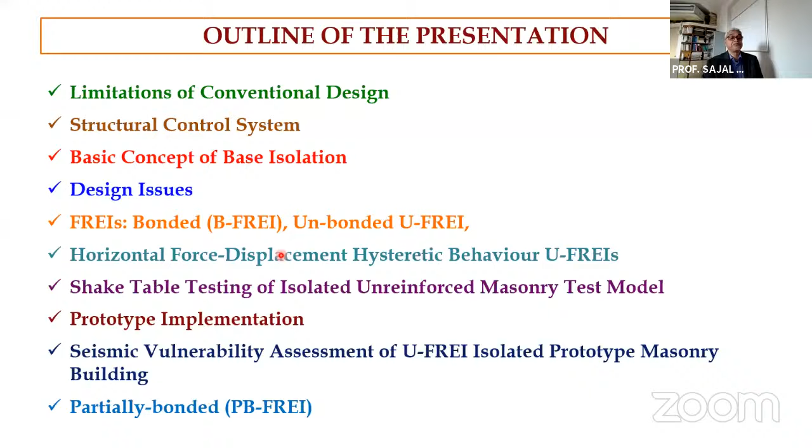Now, all of us know what is the problem with conventional earthquake resistant design philosophy. We rely on damage in the structure in certain specified locations for enhancing ductility in the overall system. So that means we are ensuring safety by deliberately allowing damage in certain pre-decided locations in the structure. So a structure cannot be realistically designed in an elastic manner, particularly in regions of high seismicity.

Now, common practice is to design them so that they experience damage in a controlled manner. They undergo large inelastic excursions, and thereby we get earthquake resistance because of ductility, which allows redistribution of stress resultants. So this is what we want to avoid. We want to avoid or minimize to a large extent the damage in the structure.

So what are the options? Conventional structures cannot avoid that. Even if you follow the codal provisions, there will be damage, maybe in a controlled manner. And another thing, conventional structures actually ensure life safety performance level. So if you want to design a structure for a higher performance level, then you'll have to go for structural control techniques. So there are three types of structural control techniques.

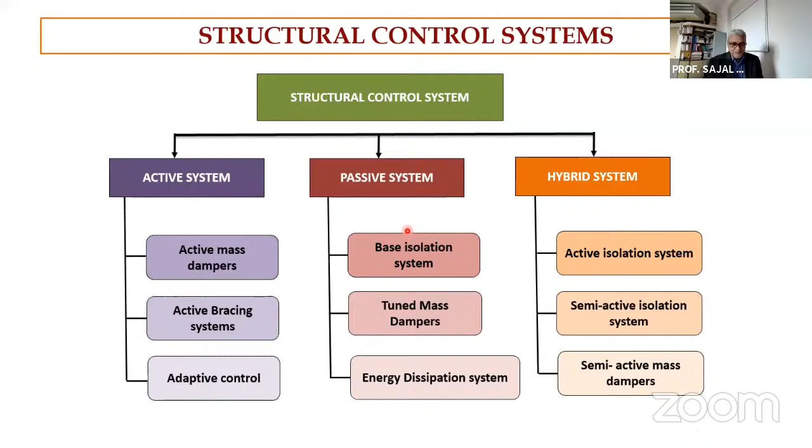Now, once you mount your building on isolators, basically it decouples the building from the damaging component of your earthquake input motion, and thus prevents the superstructure of the building from absorbing earthquake energy. The entire superstructure must be supported on discrete isolators whose dynamic characteristics are chosen to uncouple the ground motion. So here comes the role of design of this isolator: how to fix the dynamic characteristics of these isolators so that we can decouple, and transmissibility of ground motion to the superstructure will be minimized. So that is what we are going to discuss today.

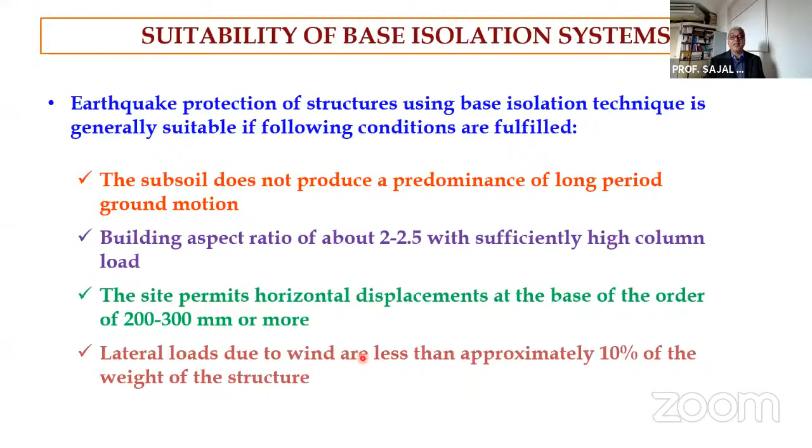At the same time, we can reduce the stiffness for achieving this frequency of 0.5 hertz in the isolated structure, or 2 seconds of time period. Okay, so this is the objective. Now, how do we achieve this low stiffness in the horizontal direction, while the same unit has to transfer the column load, so they should have sufficient vertical stiffness, and in turn provide vertical stability? So how do we achieve that?

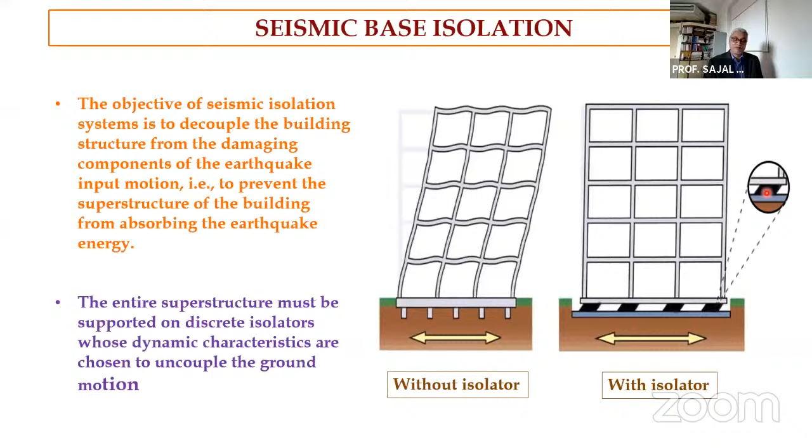Now, as I already told you and showed in this slide, these elements will be subjected to large deformation, while the superstructure will experience very low interstory drift. So this element should be able to carry both the high vertical load transferred from the column, as well as the large horizontal deformation it will experience. Both actions have to be taken into account, so estimation of the maximum displacement is very important.

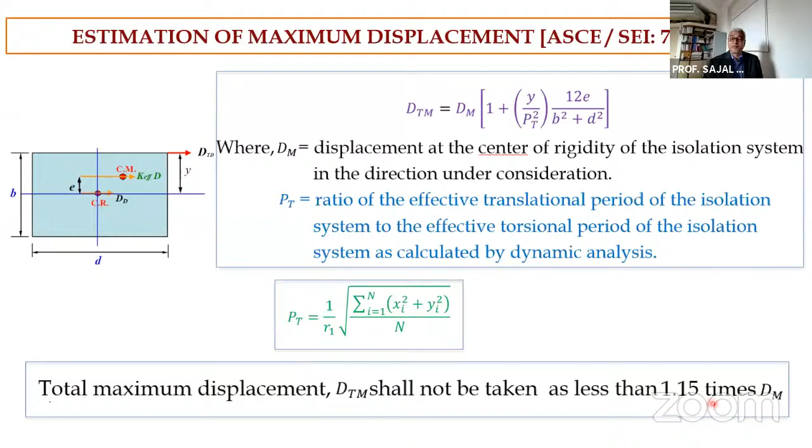If it is less than 1.15 times DM, then you will have to consider at least 1.15 times DM, that is 15% more corresponding to this DM. So these are the two things you will have to consider in isolated design. These are very important things.

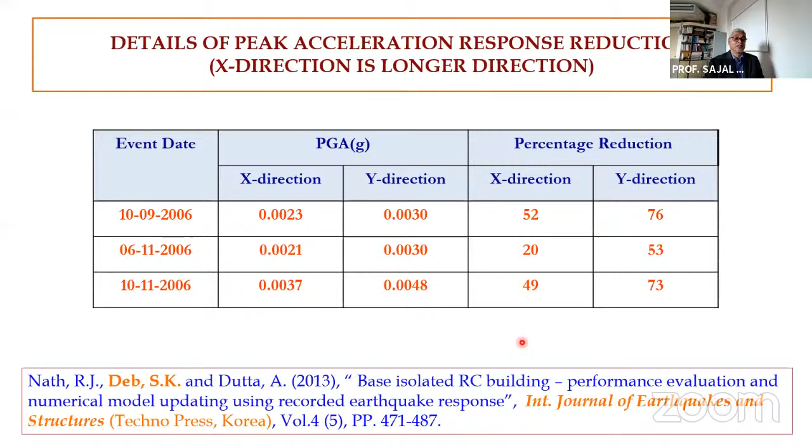Because of those limitations - high weight and complexity - we started thinking differently. At that point we came across a publication from Professor Kelly around 1999. As I told you, this was the first published work in FREI, that is fiber reinforced elastomeric isolator. We also started around 2009, 2010, and have already published around seven papers in top international journals.

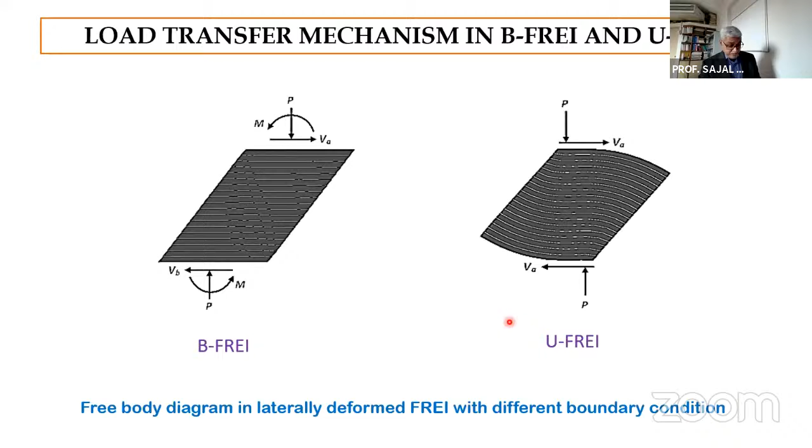So this is the basic difference between the load transfer mechanics of the unbonded isolator, whether it is steel reinforced or FREI, bonded FREI - here it is totally different. The mechanics is totally different for the unbonded fiber reinforced elastomeric isolator. This is the point you need to understand at the beginning.

Now this is about how to model your FREIs, and what are the advantages. Use of fiber reduces the weight, as I told you. Some modification will be needed in manufacturing technologies - sandblasting, acid cleaning, etc. is not required. You can go for long strips and then cut to smaller sizes, but this is a very difficult exercise, as we have seen. We have designed FREI, model FREI, to start with.

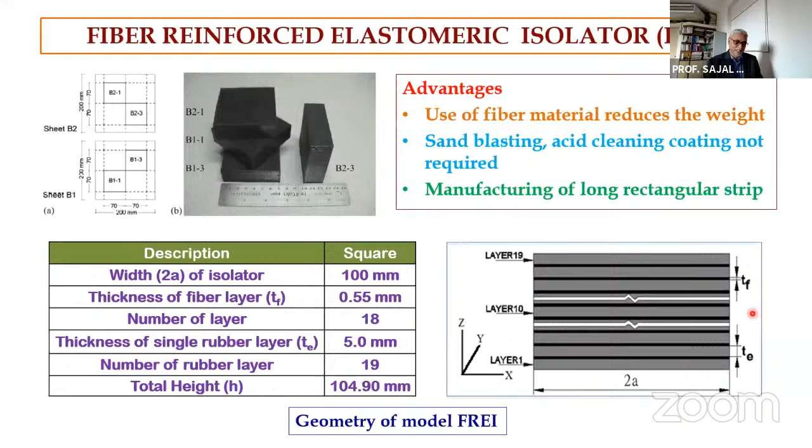This is the geometry, this is the elastomer layer. The black line is your fabric, carbon fiber fabric to be more precise. We have designed this and calculated the critical load also, and that critical load should be much higher compared to the vertical load - maybe around 100 or 200 times the vertical load - so that you can avoid unwanted modes of vibration like rocking. But it allows horizontal flexibility to reduce the transmissibility of excitations in the horizontal direction.

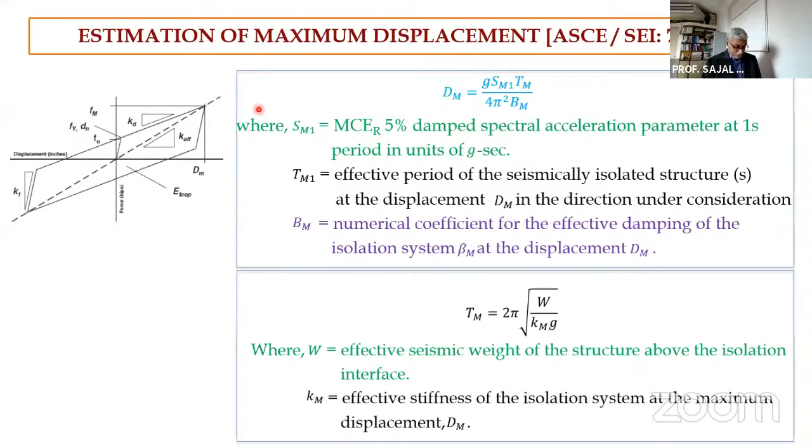Now you may wonder how our work is different from what has been reported in literature, whether from work by Tait and others, work carried out at McMaster University, or Professor Kelly's work - if you see their damping, they didn't get an increase in damping. The damping reduced with displacement. In our case, damping is increasing with displacement, so that is one fine attribute of our approach.

Our manufacturing technology is also different from theirs - they used cold vulcanization, we used hot vulcanization technique. This is a very challenging task, to vulcanize fiber and elastomer, but with the help of our industry partner, we developed the technology for hot vulcanization of elastomer and fiber fabric. This is what our innovation is all about - higher damping with higher displacement level, that is one addition, and the vulcanization process. This is the main outcome of our innovation.

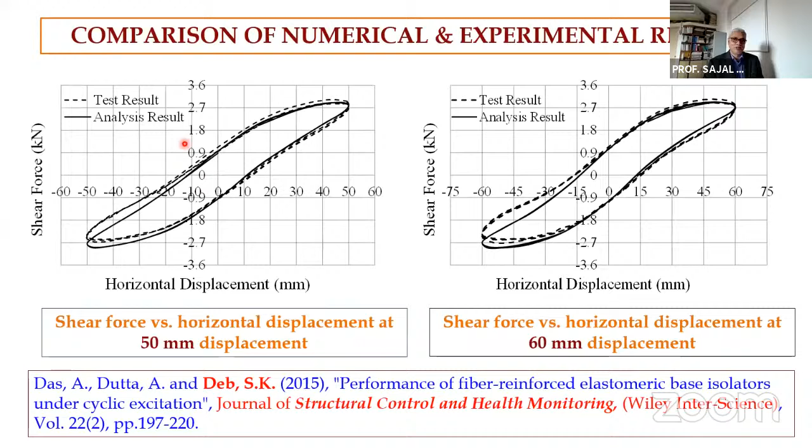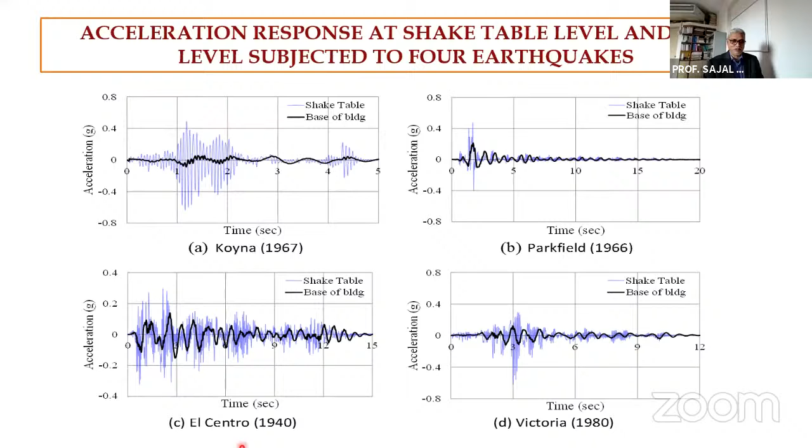Now here you see, the light response history shows the table motion, and the deep one shows that at the base level here. Base level for Koyna, and you see a lot of reduction in transmissibility of ground motion. In fixed base, as you move towards the top, it will increase, it will amplify. Here it is getting reduced. So the isolator we have designed is effective irrespective of characteristics of the ground motion. It is a reduction anyway. And here at the base level, first floor level and roof level, we have plotted the accelerations, and you see more or less they are overlapping one another.

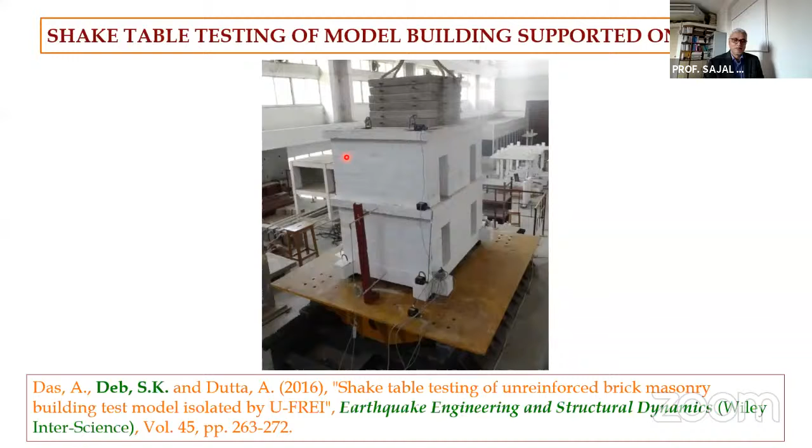That means what? There is no amplification of acceleration as we move from the bottom accelerometer to the top accelerometer. There is not much amplification. So basically, this test model of unreinforced masonry is acting as a rigid body. And there is very low interstory drift, and that is evident from this figure. Here we have shown displacement time history; displacement at the base level and first floor level are both overlapping one another, isn't it? So there is negligibly small interstory drift. So this shows that our isolation design is okay, and it is very effective.

All right, now here you can see the peak table acceleration is 0.63 g, and at the base what we experienced is roughly 1/8 of that, or 1/7 of that. Okay, so large reduction in Koyna.

In the Parkfield earthquake, around 60% reduction at the base level. In El Centro, around 50% reduction. So this reduction is a function of the characteristics of the ground motion. So this is what we see in passive control.

In active control devices, their effectiveness will be more or less the same, because we shall be tuning their properties in real time, but in a passive system we cannot do that. So their effectiveness will vary with the ground motion characteristics, and that is what is reflected over here. But nevertheless, in all cases, we got a reduction of more than 50%. So our base isolation system is very effective.

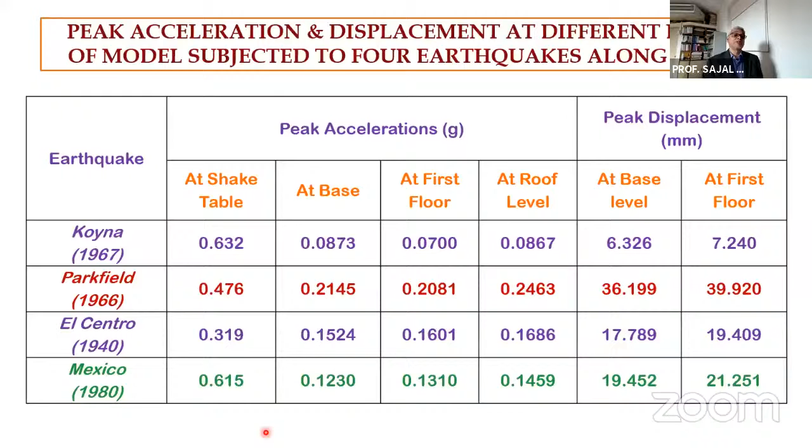So this is based on this model study. After that, we thought of implementing this in one prototype building. So this is a prototype bearing we have designed for one building, which I shall show you in a subsequent slide. So there are two sets of bearings we have designed. One is about 35 ton capacity.

Pardon? Yeah, so you can expedite. Okay, thank you. Around how much time do I have? Actually, we started a little late, so still another 10-15 minutes. Okay, I shall try to conclude.

Okay, so this is a prototype bearing, FREI, unbonded FREI to be more precise. The highest capacity was 50 ton, and the second category had 35 ton capacity. And earlier, as I told you, the steel reinforced elastomeric isolators we used in our base isolated building also have 50 ton capacity, weighing around 400 kg. This is weighing around 15 kg or so. You can lift it with your hand. And here there is no end plate at the top and bottom.

And this also we have tested. This was a makeshift arrangement we made because we didn't have an ideal bearing testing facility at that point of time. Now we are procuring one. Probably this month we shall be installing a hydraulic press specifically for testing seismic isolators, up to 300 ton capacity. That is also not big, but that is what we can afford.

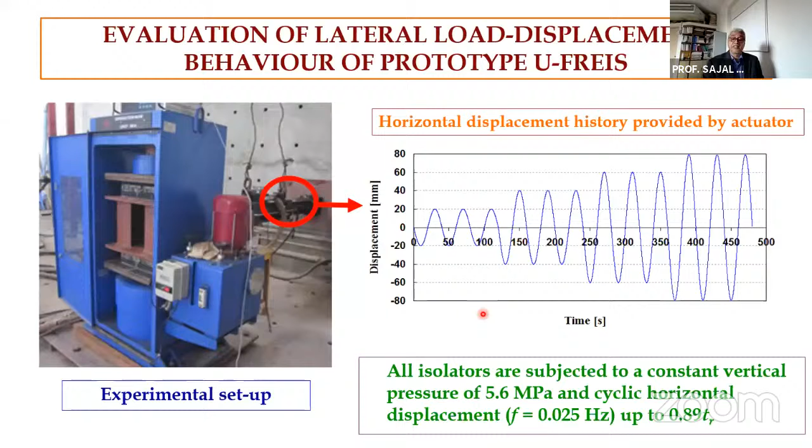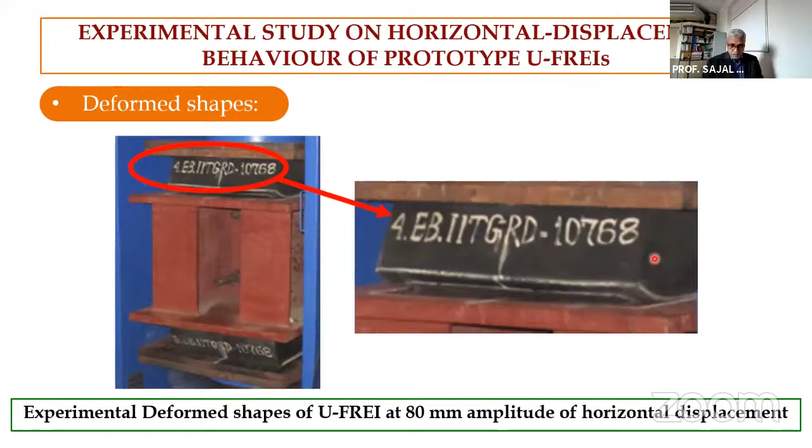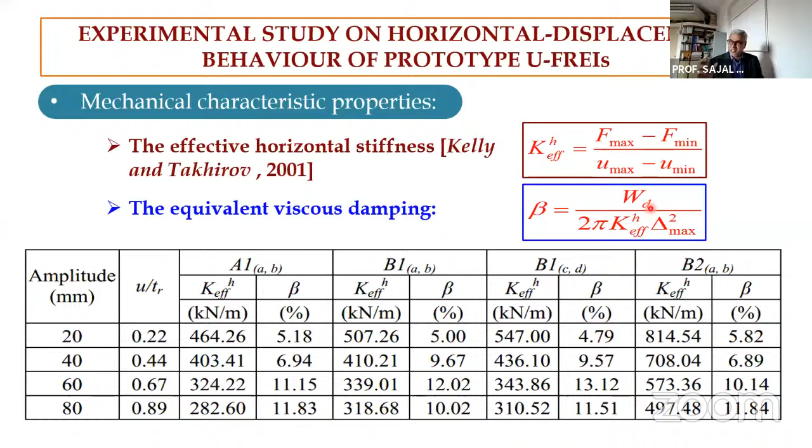This is how we have found out the effective stiffness and damping. And based on this damping, you can find the beta B factor we considered while estimating the maximum displacement. So this I shall skip. Professor Datta will talk about it.

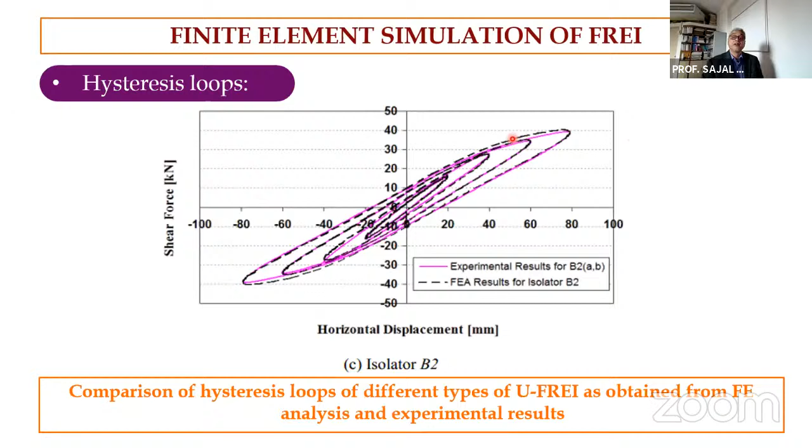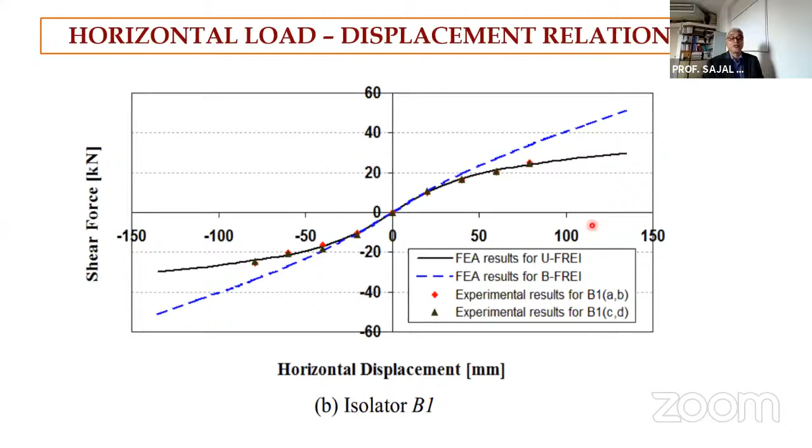Now, this is our contribution. As I told you, initially we found the stiffness of the isolator from G into A divided by tr. Now, for the unbonded one, this is what we have proposed: G we are replacing by G effective.

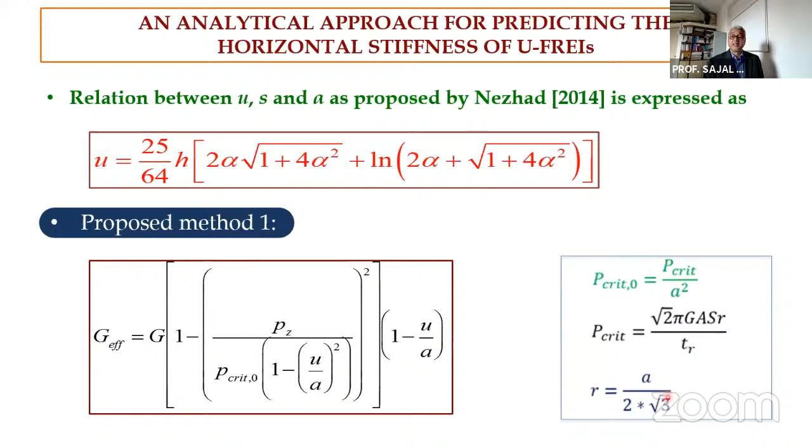Okay. How to find out G effective? What is the basis? As I told you, this will be explained by Professor Datta. And this is the equation we have proposed. One equation we have proposed. And in this, what is the definition of critical load? It is defined here. How we can find critical load? G, that is the shear modulus. This is area, then shape factor. These are all geometric properties, S and A. This R is the radius of gyration, and G is the material property.

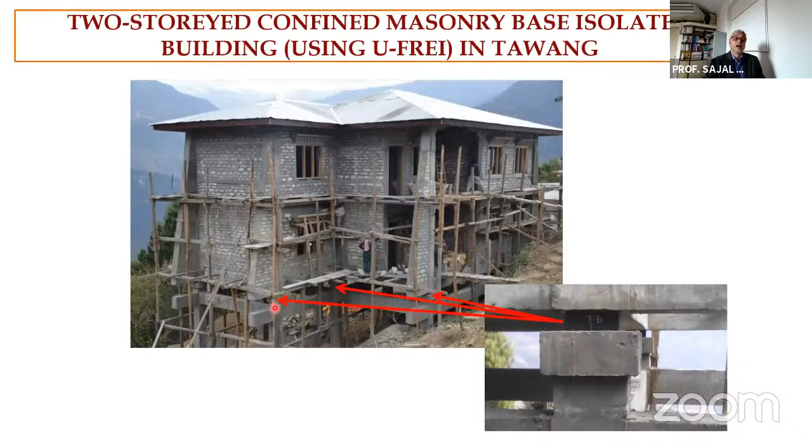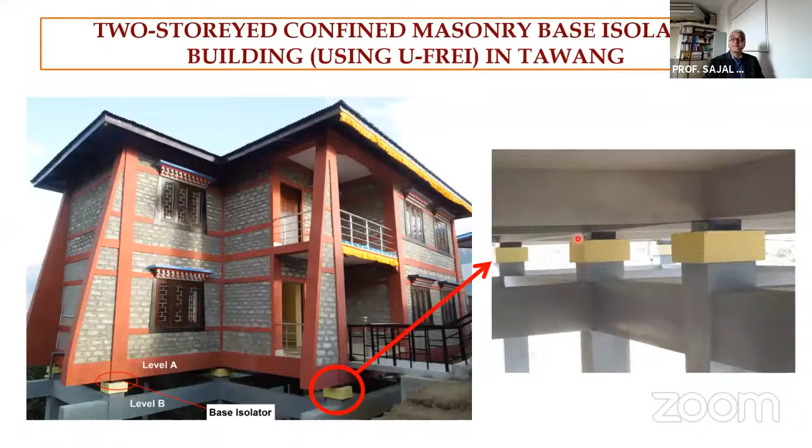So that is how we have done it, simple, and this we can do in a far-flung area like Tawang in Arunachal Pradesh. Okay, so that can be implemented anywhere. So our aim is not to develop a system only for so-called engineered and highly sophisticated buildings, but this can also be used for simple masonry buildings. Okay, so after construction, it looked like this. This is the building, a simple guest house, two-story building. These are the discrete isolation system, UFREI.

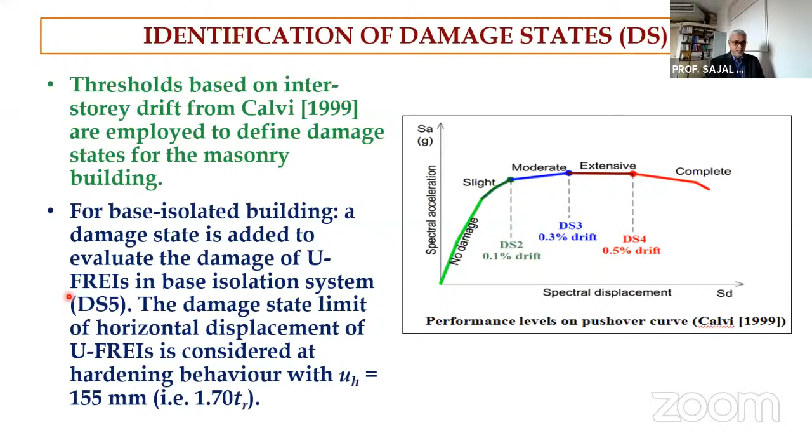Okay, then we have carried out vulnerability assessment. I'm not going into detail. For pushover analysis, we have modeled the superstructure. Then this is how we have defined the damage states, as per this particular paper of Calvi, published in 1999, and this is the additional damage state we have defined for the isolator. The first 4 damage states are for the fixed base one, and the last damage state, in addition, is for the base isolated one. We carried out the vulnerability assessment numerically for both, and considered the additional damage state in the base isolated building.

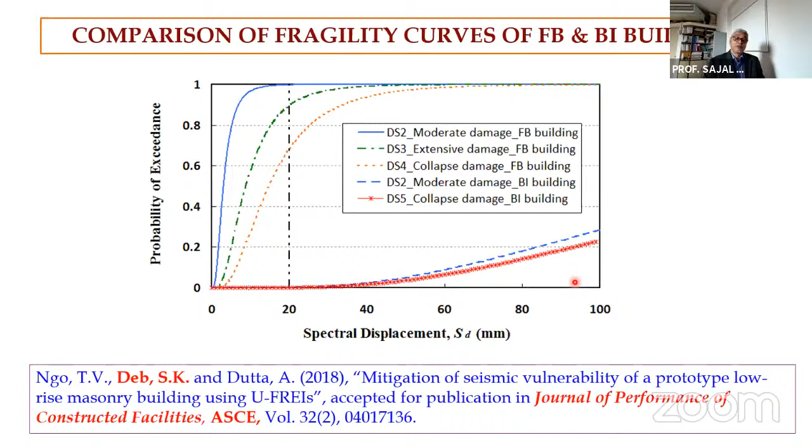Okay, now next, we have started this work on the partially bonded fiber reinforced elastomeric isolator. There was a lot of apprehension actually. What will happen?

During an earthquake, because in the unbonded case the load transfer is basically taken by friction between the rubber layer at the top and the concrete, if the normal reaction changes, what will this frictional force be? Some apprehension is there. So there is some work done by Toopchi-Nezhad and others, and they have developed this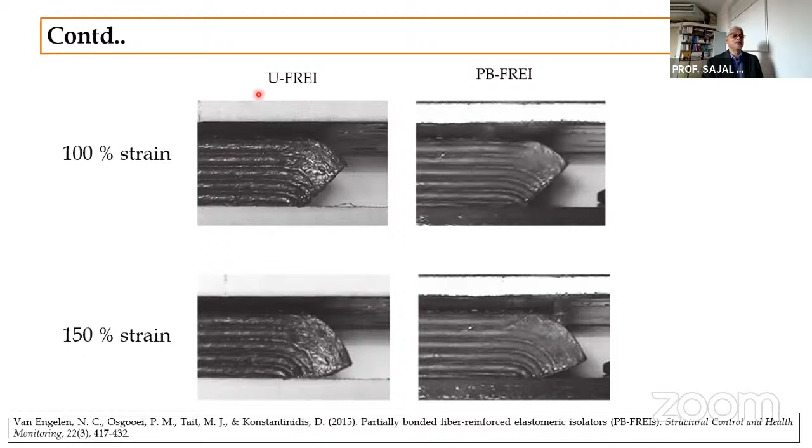They have carried out tests for both UFREI and PB-FREI, and the deformed shape in both is more or less the same. But we'll have additional safety because some amount of bonding is there. So that is what we are going to develop in our next step. And this is what we shall employ in an upcoming G+4 building in Itanagar. Here we are proposing to use partially bonded elastomeric isolators under all the peripheral columns.

There the variation in the normal direction will be higher, and here the column load is also high, and that variation will be low because these are close to the CG of the building. So these blue dots will be unbonded FREIs, or unbonded fiber reinforced elastomeric isolators. So we will be using both types of isolator as a combined system in this building for seismic isolation.

Because in unbonded and partially bonded isolators there will be a difference in height for the same properties, there will be a level difference between the two. This is the unbonded one on the inside. This is the outside one, the red dots. If you consider a section here, the bearing height will be a little more because of those end plates. If you consider, say, a 15 or 16 thick plate, 4 times that additional length will be coming.

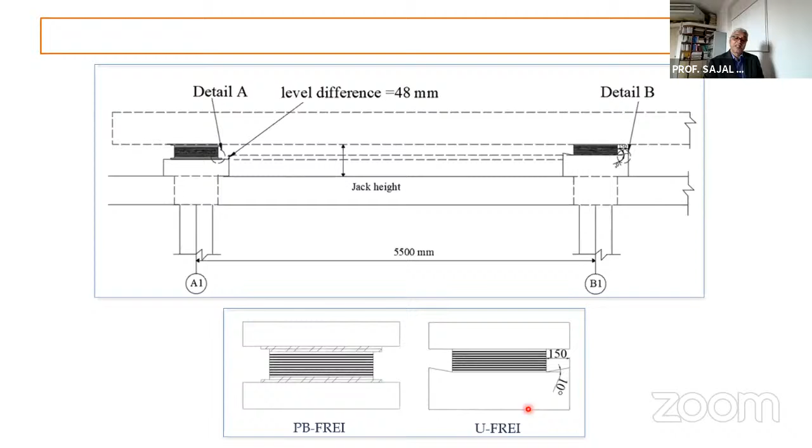So that can be adjusted. And for additional safety, we provided a profile at the bottom, something like this, so that, although we have not seen any slip, if at all that apprehension is there, we want to remove that apprehension also. So this is the last slide.

So far in India, as discussed earlier, there have been no base isolated bridges. Possibly this is going to be the first base isolated bridge in India. Originally this was planned as an integral bridge, but because of the high hazard level, the designer found it very difficult to design the piers and foundation. So now they are changing to a base isolated bridge. For these 6 pylons, there will be 4 bearings in each.

So a total of 24 bearings will be used in this bridge, which is coming in Guwahati city, the third bridge in Guwahati over the river Brahmaputra, and they will be using friction pendulum bearings. I'm not going to discuss this because Professor Matsagar and Professor Jangid will be talking about friction isolation systems. This is just a piece of information. Possibly this will be the first base isolated bridge in India, and that too over a major river like the mighty Brahmaputra.

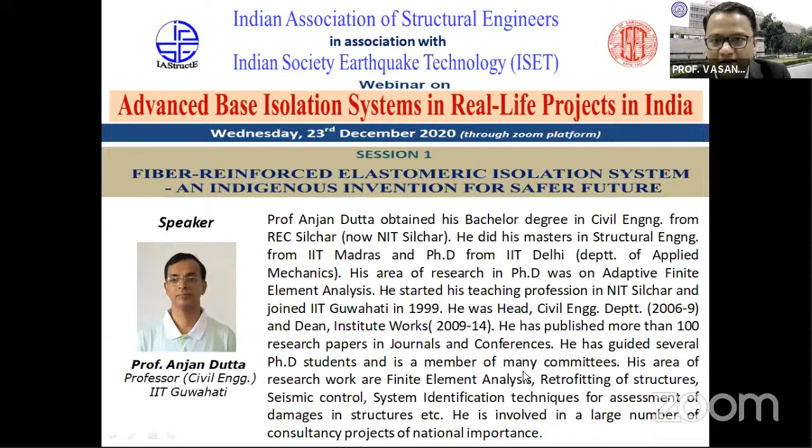His areas of research work are finite element analysis, retrofitting of structures, seismic control, system identification techniques for assessment of damages in structures and others. He is involved in a large number of consultancy projects of national importance. So today he will be talking in the forenoon session on fiber reinforced elastomeric isolation systems, particularly with focus on the finite element analysis. So Professor Anjan Dutta, kindly take over.

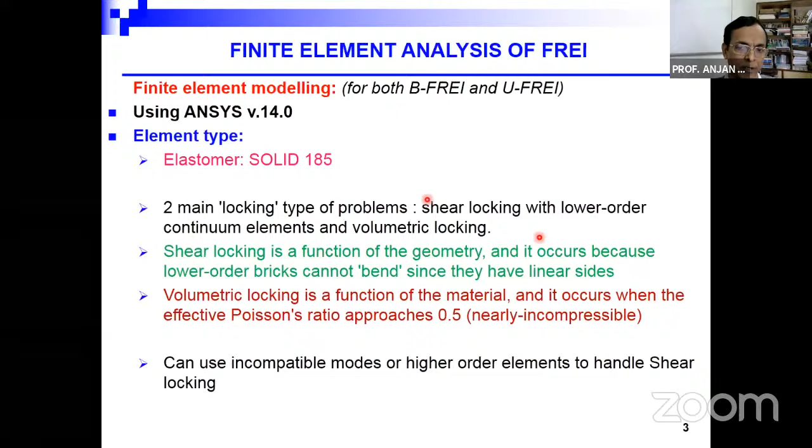You can also use uniform reduced integration. For example, if I use an 8-noded brick element, I have to use 2 by 2 by 2 Gauss integration. Now if I use uniform reduced integration, I can use only single point integration. In that process, I can get rid of both shear locking as well as volumetric locking. But in the process, it will bring in what is called hourglass effect, because there will be some zero energy modes, which are actually non-physical spurious modes. That will create problems in the analyzed results, but you can get rid of them by using a finer mesh.

Another way could be to use selective integration, but that can only help you avoid shear locking. So what we have done is use mixed formulation. Let me explain why we have used mixed formulation by looking at this.

Hydrostatic pressure is equal to volumetric strain into bulk modulus. For our case, volumetric strain will approach 0 because it is highly incompressible, so your bulk modulus will tend to become infinity. This is a problem for both higher and lower order elements, because with higher order elements you can get rid of shear locking, but not volumetric locking. So when dealing with this kind of nearly incompressible material, we have used mixed formulation.

Incompressibility of elastomer can result in serious numerical errors if standard isoparametric elements are used, where you find out stress from the strain. Now your volumetric strain is nearly 0, so finding stress becomes actually challenging. So in mixed formulation, you introduce stress also as one of the degrees of freedom.

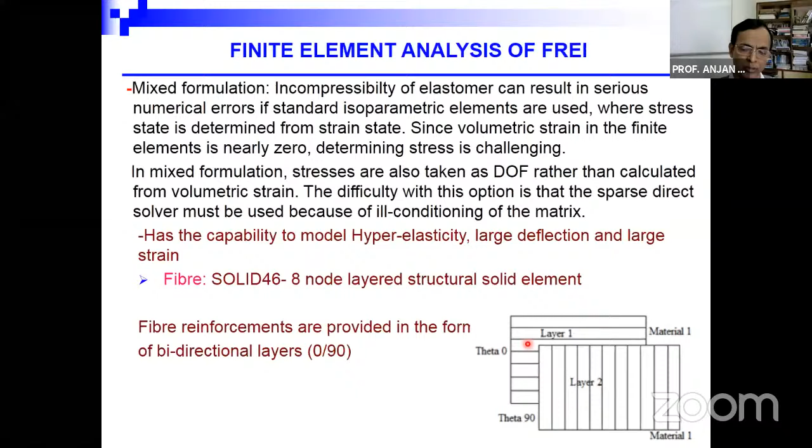Then we have another component which is fiber. For fiber we have used Solid 46, which is an 8-noded layered structural solid element, and it can take care of multiple layers. Here we have used 2 layers, 0 and 90-degree fiber fabric.

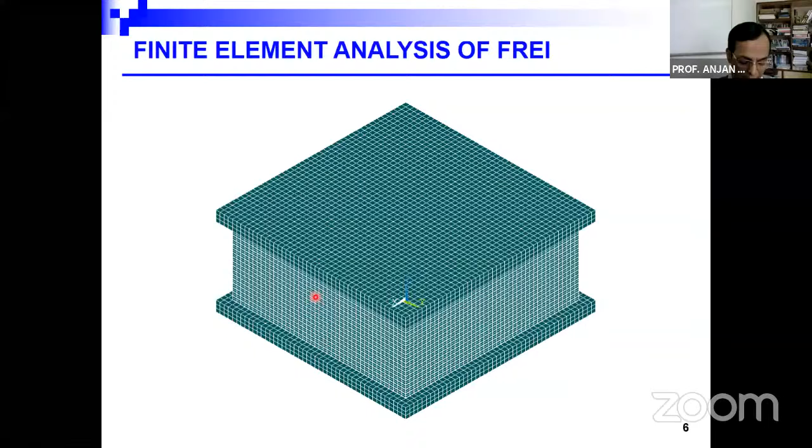So this is how your typical finite element model, after discretization of an isolator, will look like. If it is a bonded isolator, you have a top steel plate and bottom steel plate, and they become integrated, remaining integrated with the isolator. Now if it is unbonded, the top one will represent the superstructure, the bottom one will represent the substructure, and we'll introduce some contact element in between. That's what I'll talk about now.

For the unbonded case, you have to have some contact element. Why contact elements? We have used 2 rigid horizontal plates representing the top and bottom, which represent the superstructure and substructure. Vertical and horizontal loads are applied at the top plate, and it is allowed to move in both directions, vertical as well as horizontal. All degrees of freedom of the bottom plate are restrained.

Now, in order to solve this unbonded case, we have used surface-to-surface contact elements. The exterior rubber surfaces of top and bottom are referred to as contact elements and represented by Conta173. The interior surfaces of the top and bottom rigid plates are our target elements, represented by Targe170. This surface contact element supports Coulomb friction to transfer shear force, so we have taken a friction coefficient such that there is no slip between the isolator and the top and bottom steel plates.

For bonded FREI, what you have to do is remove the contact elements, because the top and bottom plates are directly connected to the rubber surfaces.

Next important thing is the material model, because the elastomer has to be modeled for both hyperelastic as well as viscoelastic behavior.

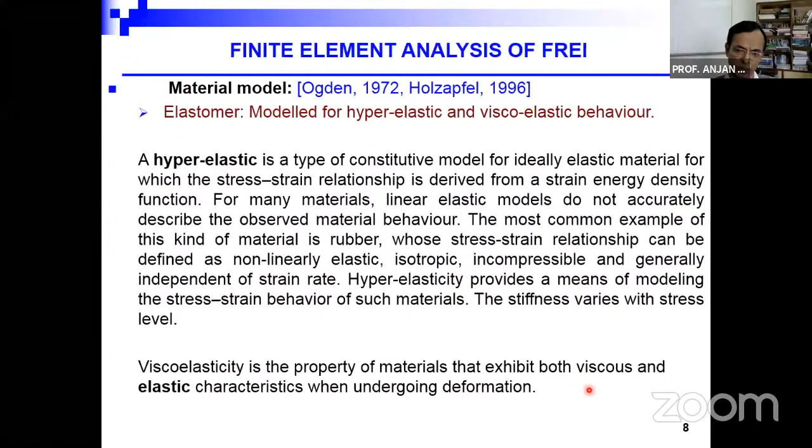So you have to use something else. Hyperelasticity provides a means of modeling this kind of stress-strain behavior, and we'll see how we can model it. It also has viscoelasticity, which means it exhibits both viscous as well as elastic behavior.

There are many material models for representing hyperelastic behavior, like the Ogden three-term model, Neo-Hookean model, Mooney-Rivlin model, and others. But we have used the Ogden three-term model, which is quite popularly used, and these are the parameters which we have picked up from the literature.

For viscoelastic behavior, we have used Prony viscoelastic shear responses, and these are the parameters which are used.

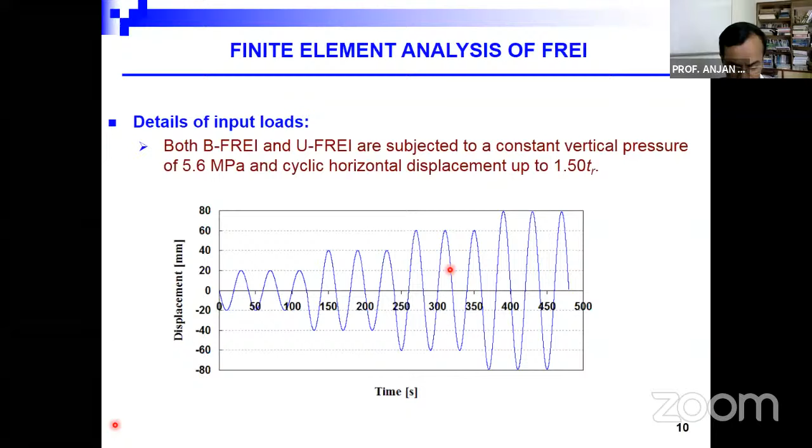This is a loading protocol, which Professor Dev has earlier shown also for my same finite element, because I'm comparing my finite element model response with the prototype that was tested in the laboratory. For my numerical simulation, we have taken 3 different cases: A1, B1, and B2.

A1 and B1 have similar shape factors, but B2 has a different shape factor. A1 and B1 have different G values, and B1 and B2 differ too. So we have tested 3 different models. These two sizes are the same, while this one has a different model size.

Like any other finite element analysis, you have to do a sensitivity analysis. So we kept refining the meshes and observed the response.

We looked at S33, which is the normal stress in the Z direction, normal to this plane. When you look at all three meshes, you can see they almost overlap, so S33 does not vary much.

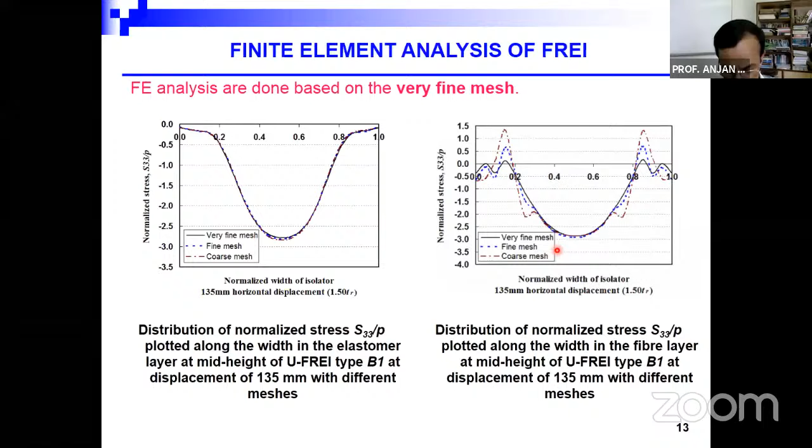This is the normalized stress, S33 by P, where P is the pressure imposed from the top, plotted along the normalized width of the isolator at mid-height level of the elastomer. But when you look at the fiber, there is some variation, so we used the finest mesh size for all our analysis.

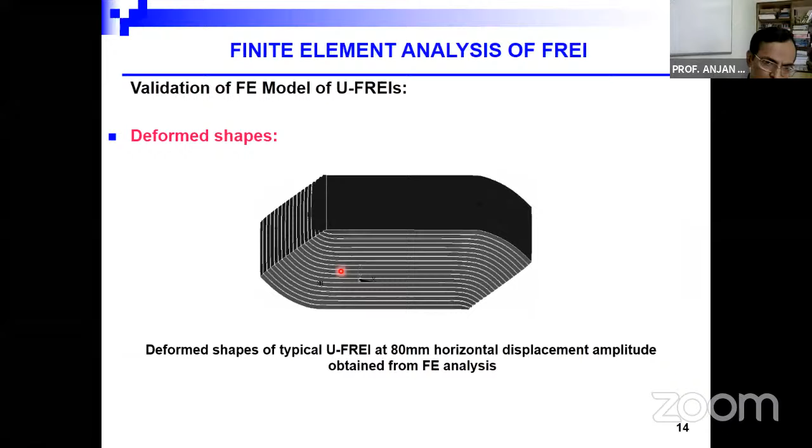This is how the deformed configuration looks, which Professor Dev was showing in the experimental verification. You have a rollover deformation here; this is a half section which we are showing, with rollover deformation like this at both ends.

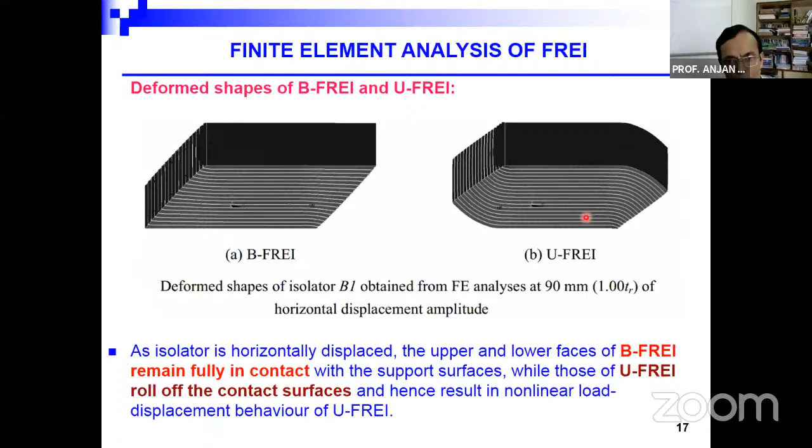This is what we have done numerically as well, for both bonded and unbonded cases, and we have seen what happens to the stress-strain state for both. Here you can see the entire thing is moving, whereas there is a rollover deformation here.

We have carried out the experiment only for the unbonded case, up to a certain level, up to 0.89 TR, and they match quite nicely. We have extended this to finite element simulation.

You can see the reduction in stiffness is much higher compared to the bonded case, obviously. So the transmissibility and seismic performance of unbonded isolators are much better than bonded ones, and this is how it looks, as Professor Dev also showed earlier.

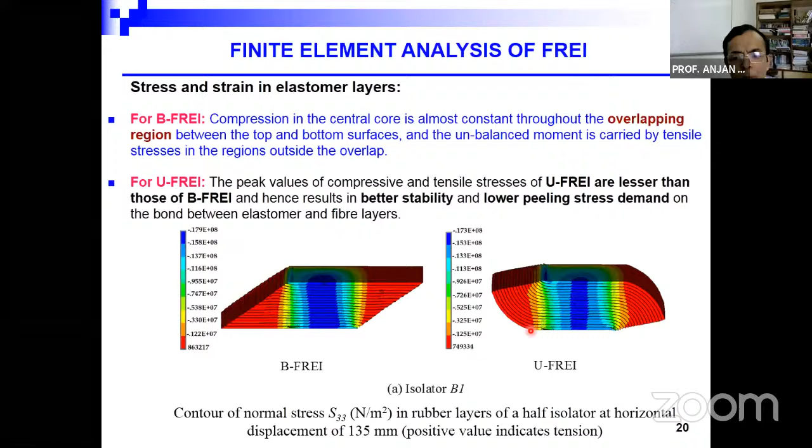Now let's look at what happens to the state of stress. Here we are looking at S33, the stress normal to this top plane, and you can see there's a central compression zone and a tension zone at two ends. This is for the bonded one. Similarly, you have a central compression zone and tension zone at two ends, but if you look at the tension value, they are actually much lesser compared to the bonded one.

When you look at the other one, S11, that means in the direction of loading, again you see there's a compression zone at the center and a tension zone at the ends. So essentially they are subjected to bidirectional compression and bidirectional tension. But the magnitude of compression as well as tension is much lesser in the unbonded case compared to the bonded one.

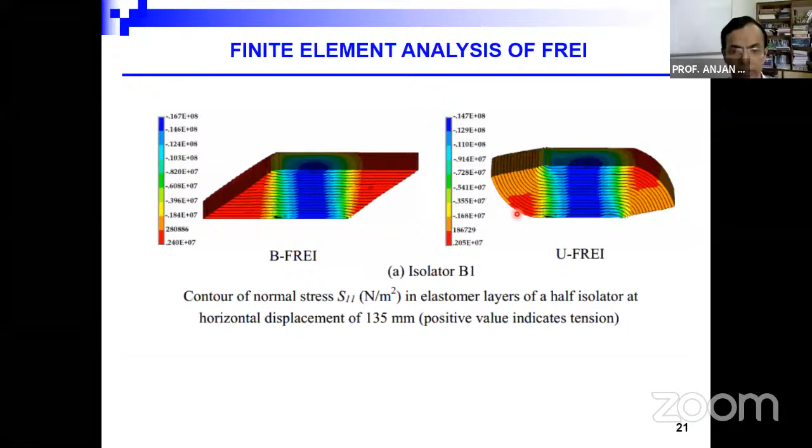So what it means, if the compression is lesser, that means my stability issue will be also improved for the unbonded one. And if the tension is also lesser, what will happen? The chances of peeling off will be also reduced in the unbonded case. Now why this is happening, let's try to understand.

See, for the bonded case, the line of application of the vertical load will not change, it remains as it is. So this is the vertical load and this is the reaction. Similarly, this is the applied horizontal displacement, horizontal load, and this is the corresponding reaction. So this is forming a clockwise couple, and this is also forming a clockwise couple. So you have to have an anti-clockwise couple to balance that for moment equilibrium, and this anti-clockwise moment is creating the tension in this zone.

But look at what is happening here. Because when you have a roll-off here, just opposite to this, there will be compression - it will try to press against this. Similarly, when you have roll-off at this end, it will try to compress against that end. So what will happen if you have more compression here, more compression there - the vertical load which was there earlier at the center, it will try to shift towards the more compression zone. So, thereby the couple generated because of P and the couple generated by H will be balancing each other, and thereby you will not require any equilibrating moment. And thereby you have lesser and lesser tension developing at the non-compression zone. That is the advantage we are accruing from this.

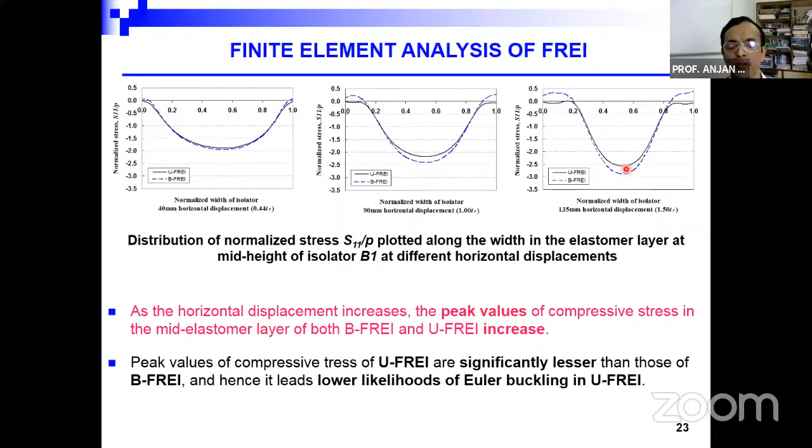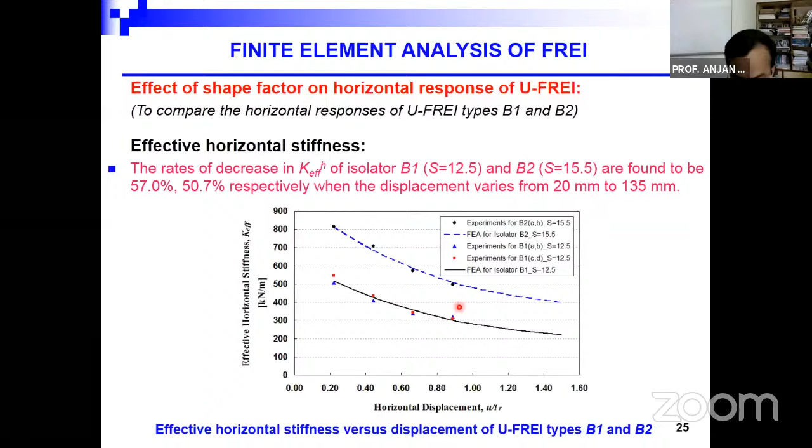When you compare different cases with different shape factors, you can see that degradation - when you look at the effective stiffness, this is for the case with shape factor 12.5, this curve, and for the one with 15.5, this curve. Here the reduction rate is about 57%, here it is slightly lesser. So the specimen with higher shape factor actually has a lesser stiffness degradation rate, so it is the most stable.

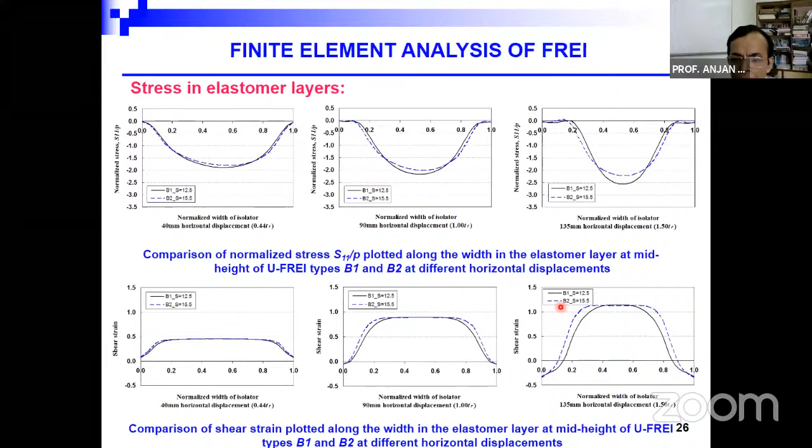This is what you can see when I compare B1 and B2, with different shape factors. When you have higher shape factors, you can see the compression stress which is developing is also lesser. For shear, the magnitude is more or less similar, and it shows the extent of shear will be according to the contact surface.

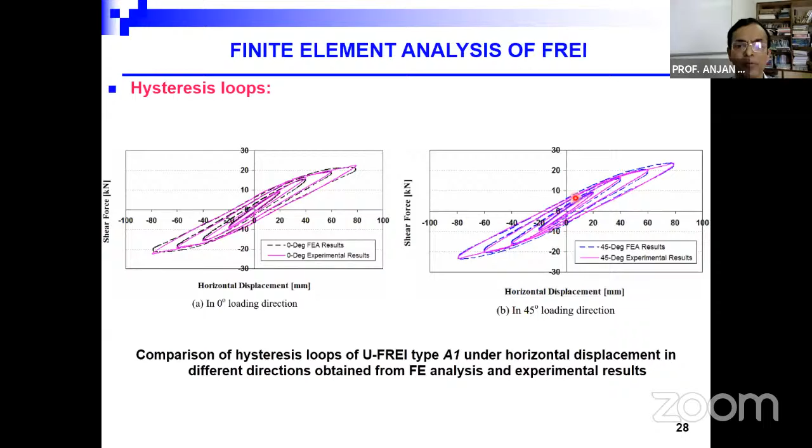And this is what you can see as you go on changing the direction of loading from 0 to 45 degree, the load carrying capacity increases, because you see the shear force is more for the one corresponding to 45 degree than the one corresponding to 0 degree. And as I said earlier, the contact area of the isolator with the support surface increases as the loading direction changes from 0 to 45 degree.

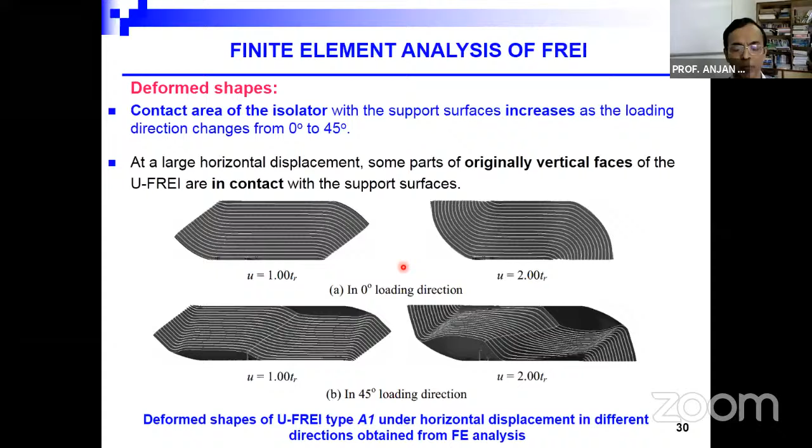So at a large horizontal displacement, what will happen? As you go on increasing the displacement, as you can see, it is rolling off, rolling off. At some point in time, it will come and rest, it will be in contact with the support surface. So when it comes in contact with the support surface, let's see what happens. This is what will happen.

There will be hardening for any loading direction, but the displacement limit corresponding to hardening behavior is observed to increase as the loading direction changes from 0 to 45 degree.

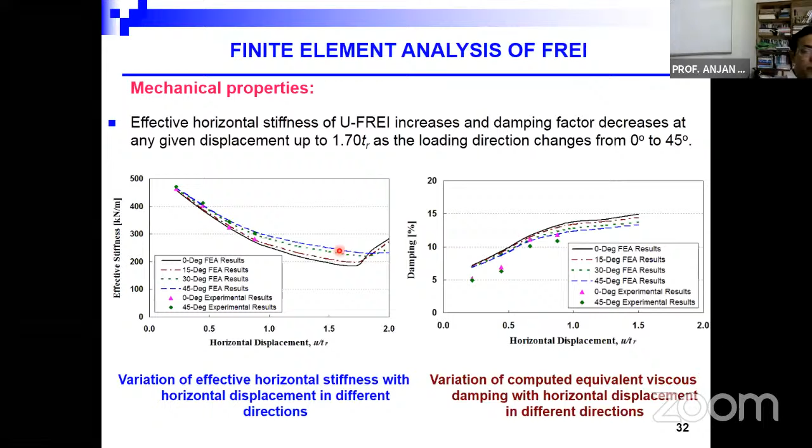And you also see the variations of effective horizontal stiffness with horizontal displacement in different directions. This is corresponding to 0 degree. Effective stiffness is more for 45 degree angle of loading than 0 degree angle of loading, but damping is reversed. You have more damping corresponding to 0 degree than 45 degree.

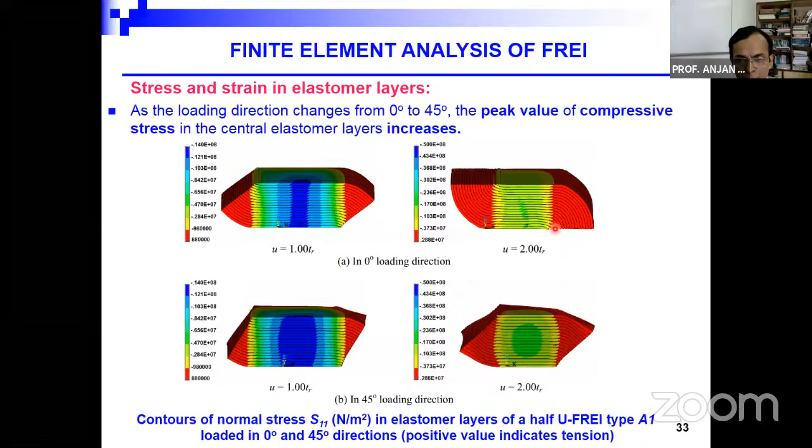And when you look at a similar stress plot, this is for 0 degree loading at much larger displacement, and this is for 45 degree loading. And when you look at this plot of normalized stress, 45 degree shows a higher stress level compared to the 0 degree loading case. But it is reversed for shear strain.

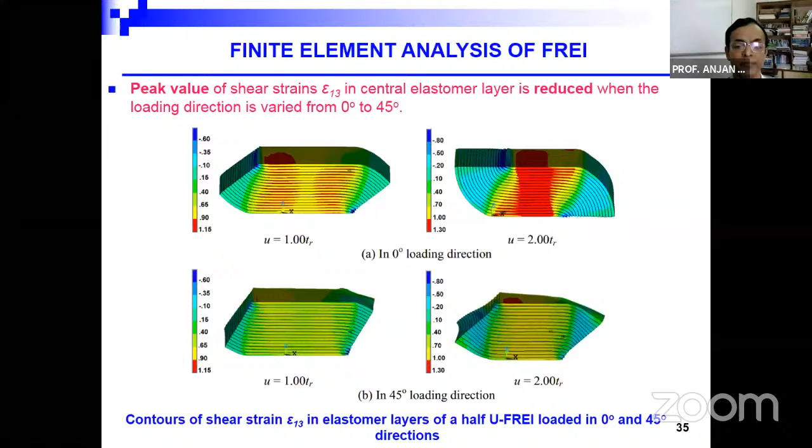So these are some of the conclusions which we can draw. Good agreement is observed between the findings from experimental and finite element results. Horizontal stiffness of UFREI is significantly lesser than BFREI, and hence it possesses significantly higher seismic isolation efficacy. Significantly lower compression stress demand in elastomer, as well as lower peeling stress demand in the unbonded case compared to the bonded case.

And peak values of compression stress in elastomer of UFREI with smaller shape factors are higher than those with higher shape factors. And as loading direction changes from 0 to 45, K effective increases at a given horizontal displacement, and then there are some variations beyond 1.7 TR.

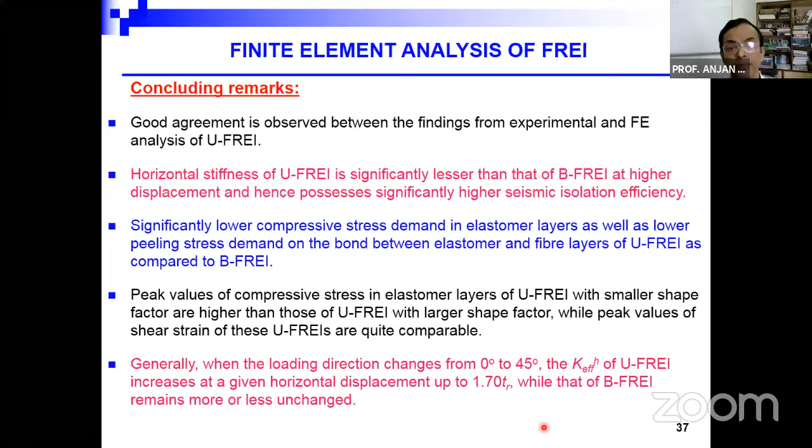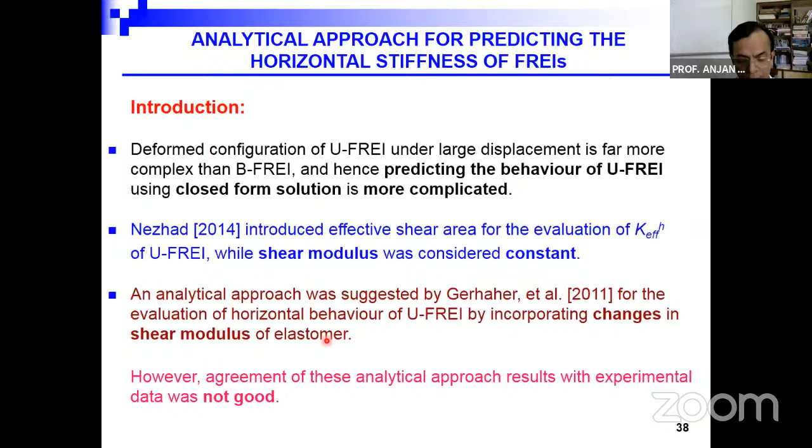Now, we understand that there is a nonlinear load deformation characteristic for the unbonded case. Eventually you'll be testing it, but initially you have to have some design guidelines so that you can come up with the sizes and manufacture before you actually test it. We looked at the literature and found that it is all there for SREI, and there are some recommendations for FREI also. But there are some discrepancies, which is what motivated us to improve these recommendations.

So this is what is available for SREI, and we have recommended for bonded FREI something like this, because we understand that A is not going to change, but if at all there is a change, it will be in G effective.

All right, and we have looked at the literature, and we have found for bonded FREI, Gerhaher group has given some suggestion like this for G effective, for bonded, and for unbonded case also something like this. But also we have seen there is another recommendation by Nezhad group for K effective for unbonded, where they have not done anything for G, but they have played with A effective.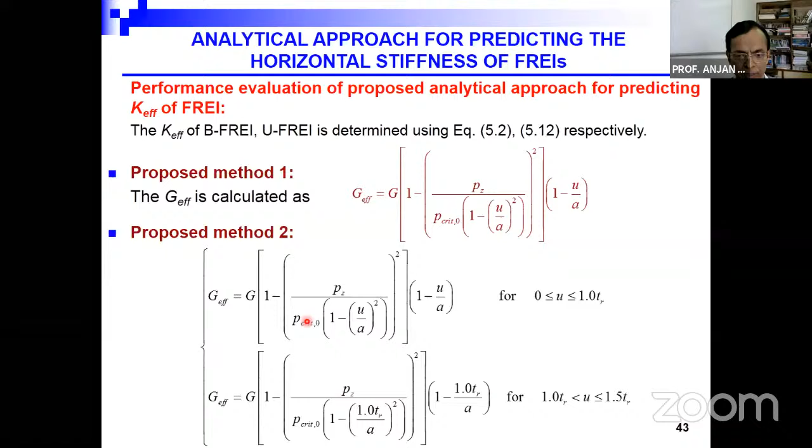And so we have proposed two methods: method one, where we have not really bothered to see what is the influence of the displacement limit. And in the other case, we have proposed two different expressions for two different displacement ranges.

And then when we have plotted for the unbonded case first, you see this is what you can see for the existing ones, Gerhaher and Nezhad, and this is my finite element result, this pink line. So they are nowhere close to that. And we cannot doubt our finite element result, because my finite element result is also matching with my experimental values. All right. So our proposed method one is actually this, and proposed method two is this. So we could see proposed method two is very nicely matching with this.

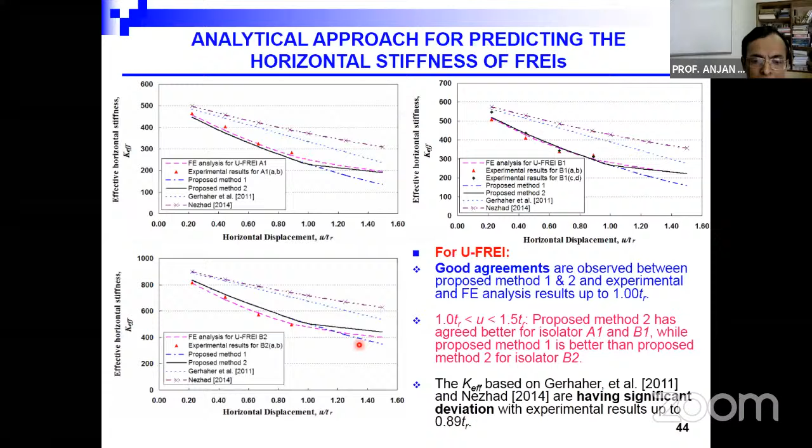Similarly for other shape factors, B2, and this is for A1, this is for B1. However, for B2, we have seen proposed method one is relatively better than proposed method two. And so also we have seen for the bonded case. So we can understand that we have some expression now in place, and this can be used at least for the preliminary design for bonded as well as unbonded FREI cases. And then you manufacture them, get them tested, and see how they perform. So again, I'm not reading the conclusion. This is what I've already discussed.

Now, having done this numerical exercise for bonded and unbonded cases in terms of evaluation of their horizontal load displacement characteristics, we also should know how good they are in terms of vertical stability. So we looked at the literature and found that there are some suggested models, but most of them are for the bonded case. And even if there are some cases for UFREI, they are for scale models. So we thought we should do it for a prototype unbonded case.

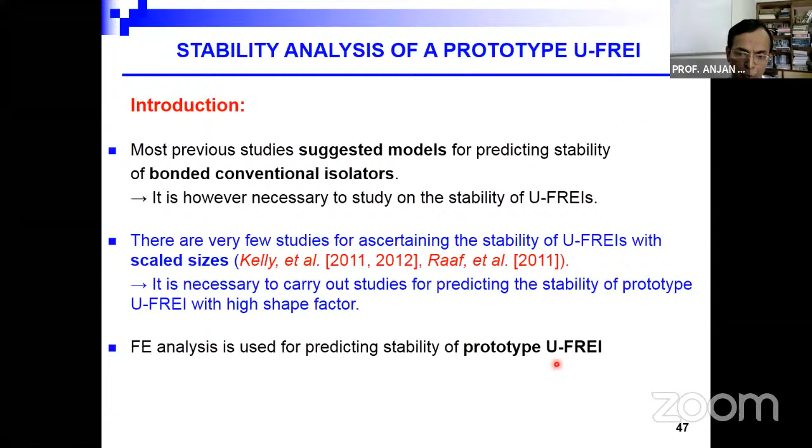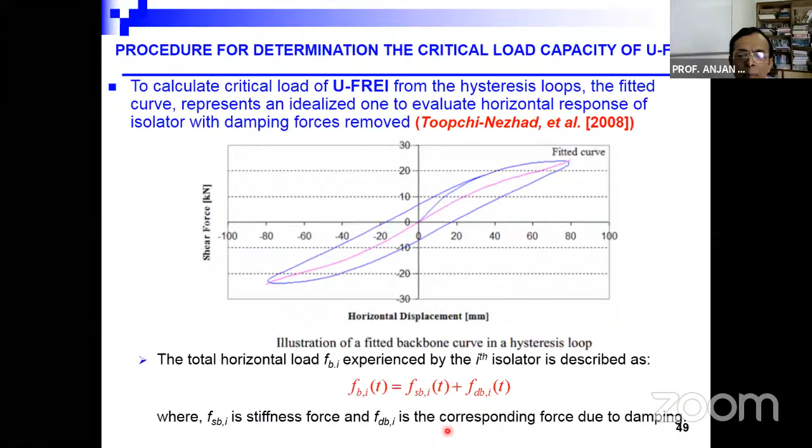Now we have got this kind of hysteresis plot. So we have looked at this again based on the recommendation from Toopchi-Nezhad. We have looked at a fitted curve which passes through the central line. So that means we are not taking care of the effect of damping. So we know that the total horizontal force will be a combination of the stiffness force and the viscous force. And the stiffness force can be modeled using a fifth order polynomial, something like this. And then we find out what is the derivative of this. All right.

And then there is another recommendation we could see from Stanton, who defined the tangential stiffness at zero horizontal displacement. So this is what we are calculating as tangential stiffness. Now he's saying tangential stiffness at zero horizontal displacement will be termed as transverse stiffness. And we'll find out what is the vertical load corresponding to zero transverse stiffness, and that is what will give us the critical buckling load.

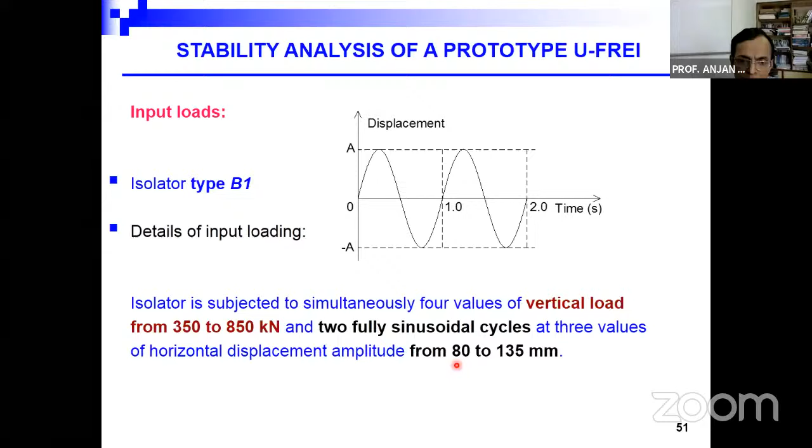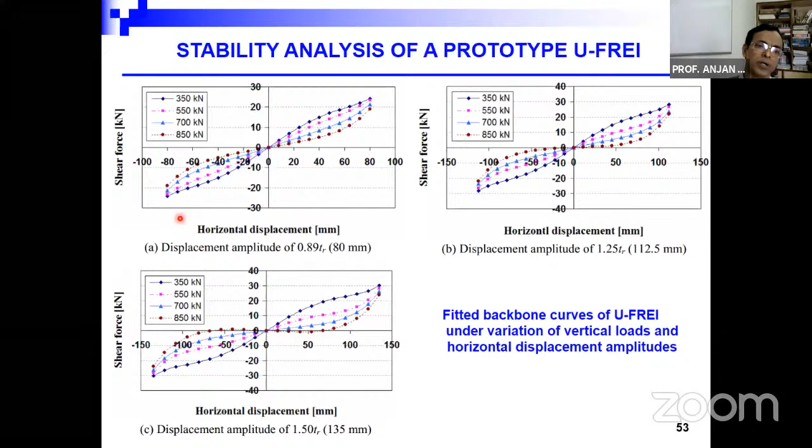So this is what we have done. And this is the loading protocol. We have gone on changing the vertical load from 350 to 850 kilonewton gradually, and the horizontal displacement from 80 to 135, because up to 80 there is nothing going to happen. And these are your different hysteretic plots, and we have found out what is the corresponding fitted curve for different variations of loading as well as displacement amplitude.

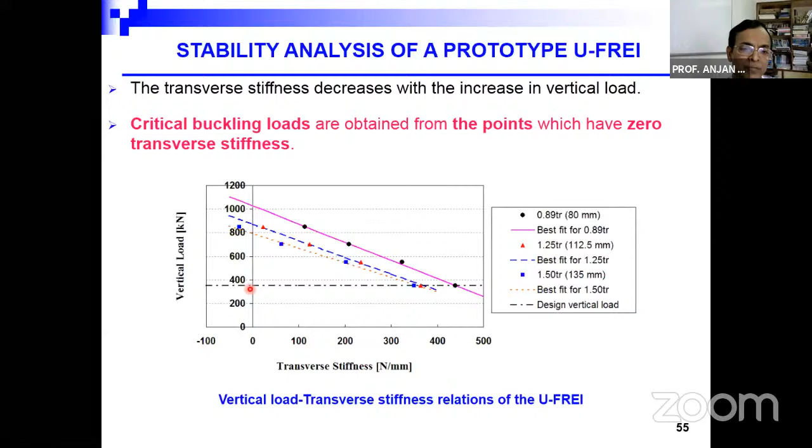From this fitted curve, we have found out the plot of tangential stiffness versus horizontal displacement. And from here, you find out the corresponding horizontal tangential stiffness at zero displacement level for different loading, different displacement ranges. And this is what we have plotted. So corresponding to zero horizontal displacement, you get the transverse stiffness. So you plot vertical load versus transverse stiffness. And wherever you have transverse stiffness zero, that will give you the buckling load. So this is what finally we plot.

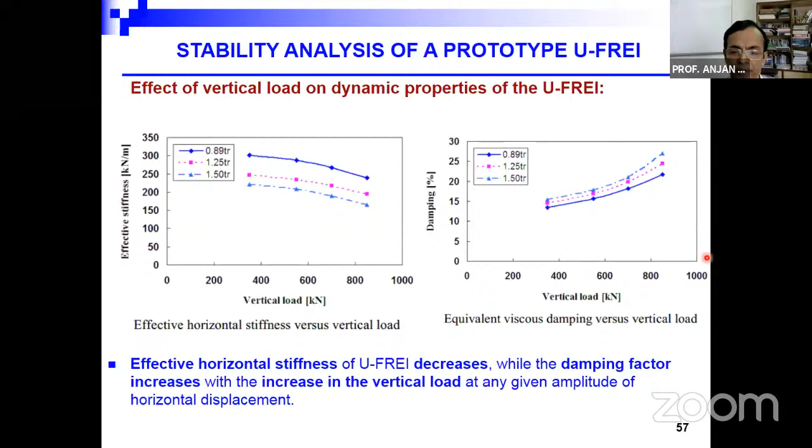So for our specimen, we could see the buckling load is far, far higher. So your specimen is safe. And that is what we have seen when we have actually implemented them. We couldn't see any bulging whatsoever. So they're absolutely fine. And we could also see the variations of effective stiffness with vertical load. You can see that it actually decreases with increasing load, whereas damping increases with increasing load, increasing horizontal displacement. So these are some of the conclusions.

And this is the typical building which Professor Dev showed earlier. I'll just show you how we have modeled the entire building system. This is a building. And we have done modeling of these structures using both SAP as well as Abaqus. In SAP, we have used a nonlinear layered shell element. And these isolators we have modeled using rubber isolator elements. In fact, this is a Bouc-Wen model only. And we have used a bilinear hysteretic model, taking equivalent bilinear hysteretic characteristics. And we have used a Mohr-Coulomb model here because SAP doesn't have any other model.

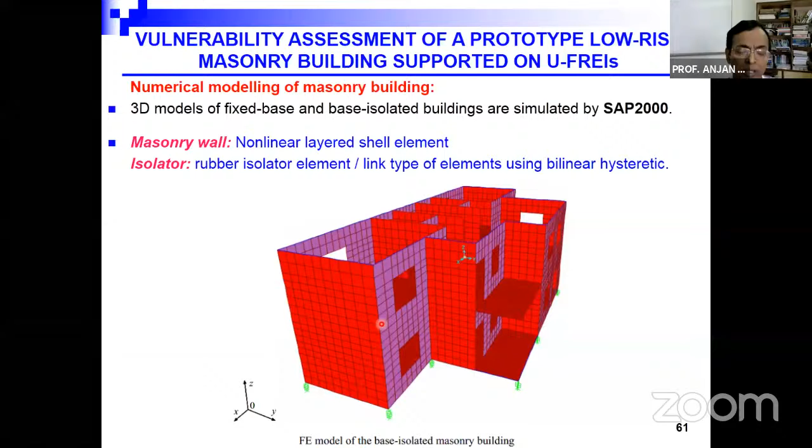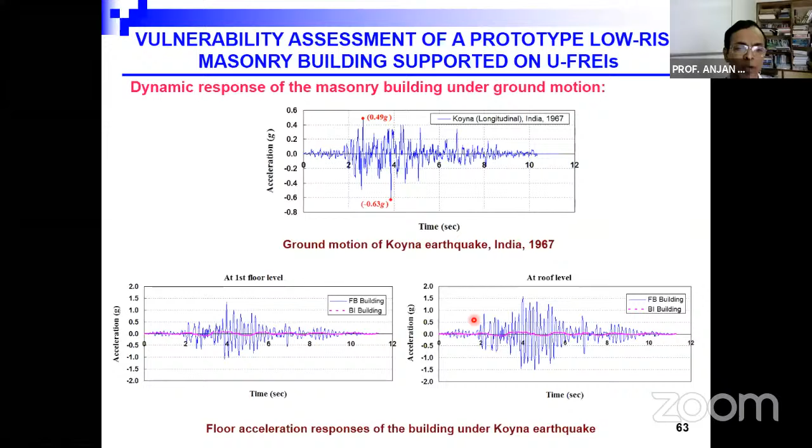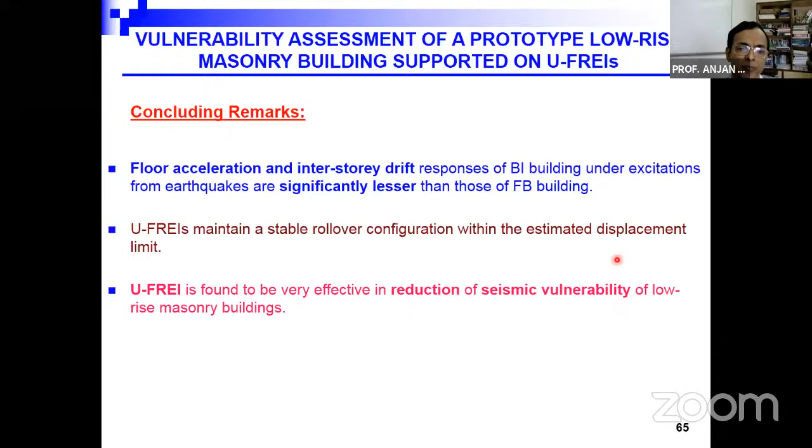So from floor accelerations and interstory drift, we can see that base isolated building accelerations from earthquake are significantly lesser than those of fixed base building. And UFREIs maintain stable rollover configurations within the estimated displacement limit. UFREI is found to be very effective in reduction of seismic vulnerability of low-rise masonry buildings.